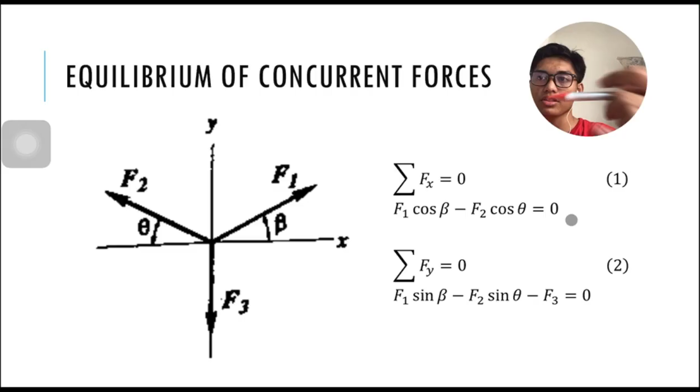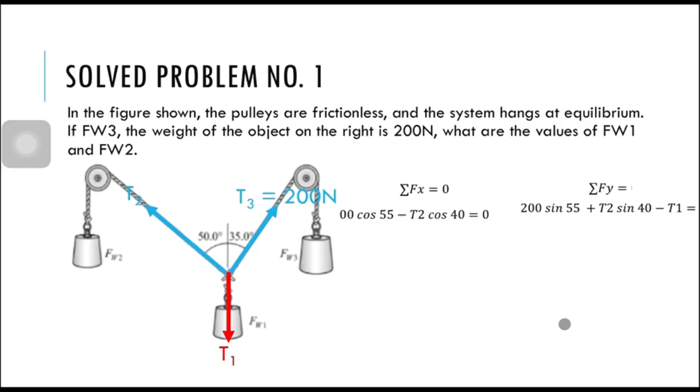Ngayon, if you feel annoyed sa pagsosolve ng simultaneous equation, kahit nung kayo ay junior high school or senior high school, sa inyong Gen Math or sa inyong Mathematics 8, gagawin lang natin, meron tayo diyang Caltech. Ano po yung Caltech? Calculator technique. Okay, other solution we're using calculator technique. Papakalk natin yan.

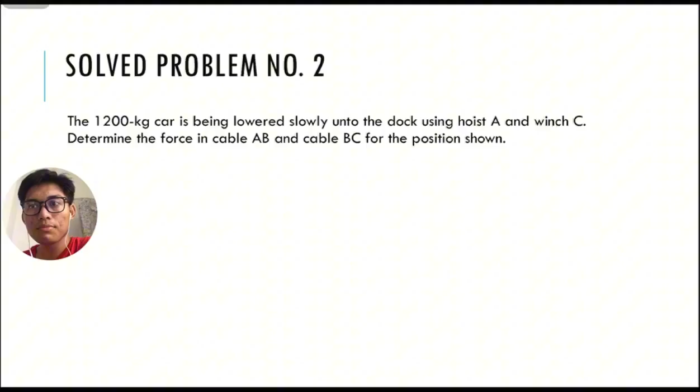Okay. So, next, solved problem number 2. The 1,200 kilogram car is lowered slowly onto the dock using hoist A and winch C. Determine the force in cable AB and cable BC for the position shown.

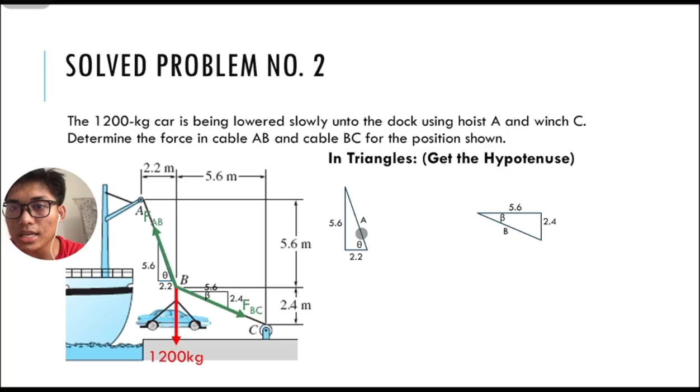Using Pythagorean theorem, kung kayo ay grade 9 alam nyo na yan, saka nung pre-cal, hopefully everyone na math learners. Using Pythagorean theorem, gagawin lang natin dito para mawala yung square ni A, i-square root nyo both sides, and you will get.

6.016643588, 83 rather. Okay, para hindi nyo lagi i-type yan, pwede nyo siyang i-store. Diba kung sabihin natin, another Caltech ulit.

Okay, balik tayo doon sa mismong math. Diba gusto nyo i-store to? Halimbawa, 6.016643583, sabihin natin nakuha natin yan. Ang pipindutin nyo lang dyan para ma-store yung value, same yan sa lahat ng calculator. Shift, yung RCL na makikita nyo dyan, yung orange, yung STO. Then ngayon pipili kayo sa letter, A, B, C, D, E. Since ang assign ko dito is A, pindutin ko yung A. So ngayon ang value na ng A nyo is, ayan.

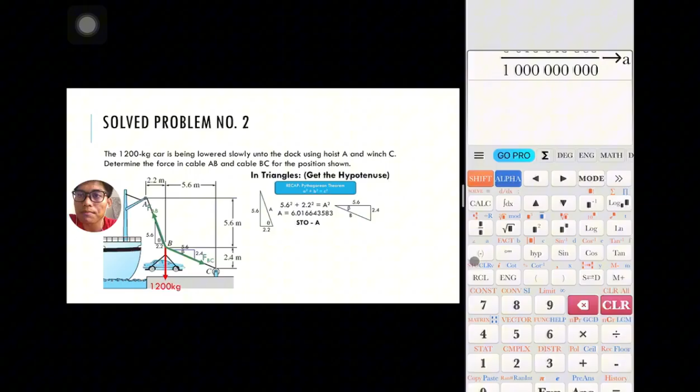Okay, para ma-prove natin kung talagang nagtagumpay tayo mag-store, na dapat ito yung lalabas. So pindutin natin si A. And iyan na yung lumabas. Oh, voila. Diba? Ganun lang po. Next, itong part na to.

So, to avoid decimal error, use stored values found in your calculator. Press shift, then choose the letter you want to choose, example A. When using, just press alpha, then choose the red button, letter A. Ano lang, na-explain ko na.

Okay, then ito naman, Pythagorean ulit, then meron tayo dito, 6.092618485. Store nyo naman siya sa B. Ganun lang po yon, shift, yung RCL na button, then yun. Next.

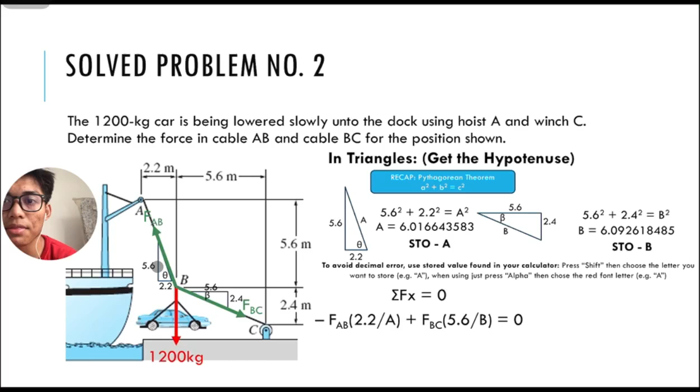Fx, yung summation, gawin natin itong part na to. Paano po natin ano to? Sabihin natin ito yung A, ito yung hypotenuse nyo na, diba? In summation of x, diba itong part na to? Yan, may pen tayo ulit.

So, 2.2, saka yung A. Sabihin natin ito yung A nyo, ito yung B, diba? For store values, we all know diba. Itong part na to, this is cosine. Sabihin natin that cosine theta is equal to 2.2 over hypotenuse, diba? SOHCAHTOA. Remember the SOHCAHTOA.

Yung sumuka ka muna bago ka natuwa, yan kasi ang technique ko. Okay, suka muna bago tuwa. Okay, ang kalat na. Okay, ito yung cosine theta nyo, diba? Cosine theta is 2.2 sine A, over A rather. So, pag sinabi namang sine theta, ito naman yung opposite over hypotenuse, diba? Ganun lang po siya.

Okay, then paano naman dito sa FBC? So, beta to, diba? Cosine beta, ano yung adjacent niya? We have 5.6, tama? Over B. Okay, nag-gets kaya? Next, sine beta, meron tayong 2.4.

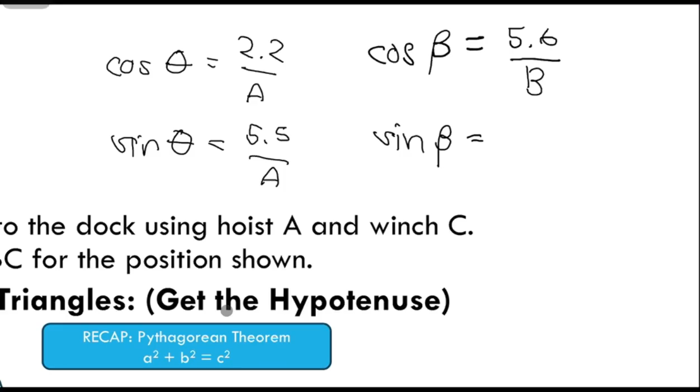Okay, namatay aking pen, nalobat. Okay, so ngayon, ayan, 2.4. Nalobat yung pen ko. Okay, so to deal with, so ganyan lang po yung ating gagawin sa ating trigonometric simplification.

Cosine to, diba, kasi adjacent siya. So ito. Next, for Fy, ngayon ito naman yung F, yung 5.6 over A, sine naman siya. Then ito 2.4 over B, minus siya kasi pababa. Then minus itong part na to.

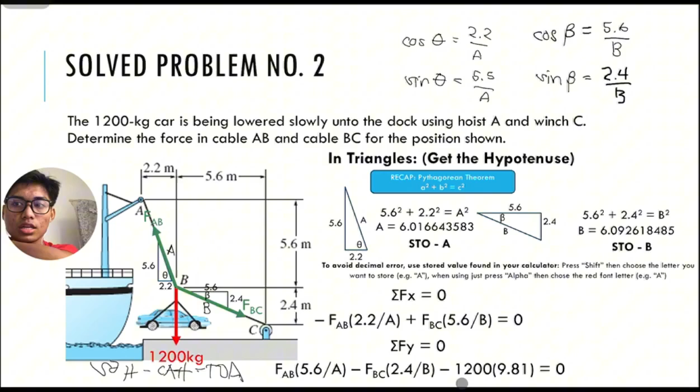Ito positive kanina, ito naging negative kasi dun siya. This is north of west, west is negative. Ito diba this is south of east. Ito, papunta doon, ngayon pababa na kasi negative na si south. Itong part na to, talaga negative yan.

Pero times siya sa 9.81 to make it Newton. Okay, another ano ulit, mode 5, 1. Ganyan lang po ang gawin natin. Ba't dyan ko nilagay yan? Okay, itong part na to, yan. Pwede nyo namang i-ano na si store value na A, kasi ganun din naman ang lalabas. Lalabas naman yung decimal niyan, ganun din dito at dito.

Ang sinet natin na x is yung force AB, so ano yung coefficient? Ito. Then ano yung coefficient ni FBC dito sa summation of x? Then yung C wala naman, so 0. Then itong part na to, ito naman. Then ito negative, ito negative to. Nilipat ko doon sa kabila, positive. Ito, sinundan nyo lang yung format. Hindi naman siya naka-equate sa 0, diba?

Then ang lalabas dyan is we have 15,208.45 Newton. And syempre, FBC, meron tayo 6,050.19 Newton.

Next, problem number 3. The system of knotted cords shown in the figure support the indicated weights. Compute the tensile force of each cord. So this part here, there's a lot going on, okay let's do it.

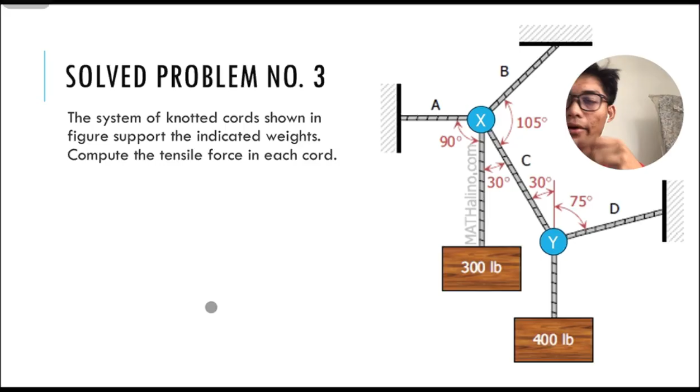Okay, so we have X and Y here. Let's label the points. To deal with this problem, truss analysis will be applied. If we watched the last video, we used the method of joints. To execute, we solve the internal forces of the cords between the 2 points given, which only have 2 unknown forces. This part here is force A, force B.

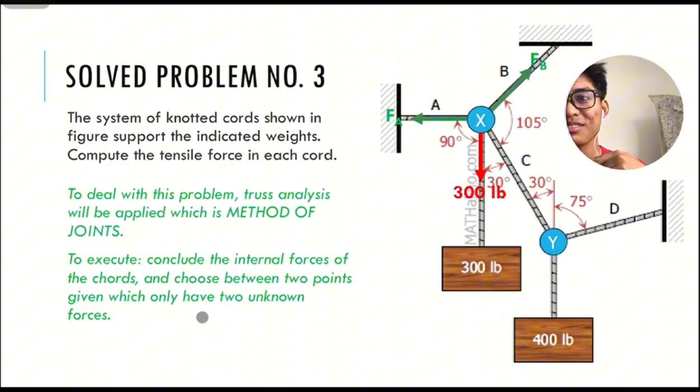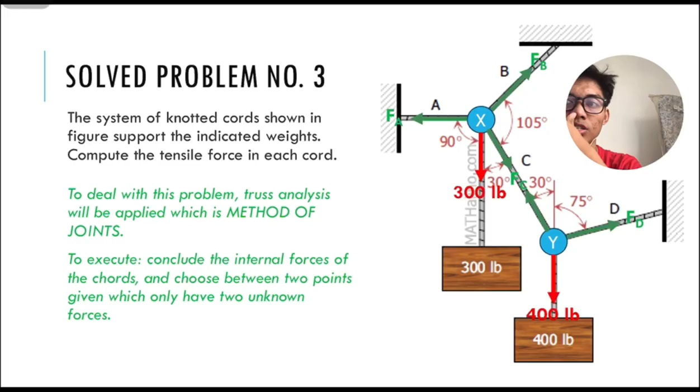There's a weight going down there. Then this part here, we have FC and FD, and we have a weight again of 400 pounds. Use point Y.

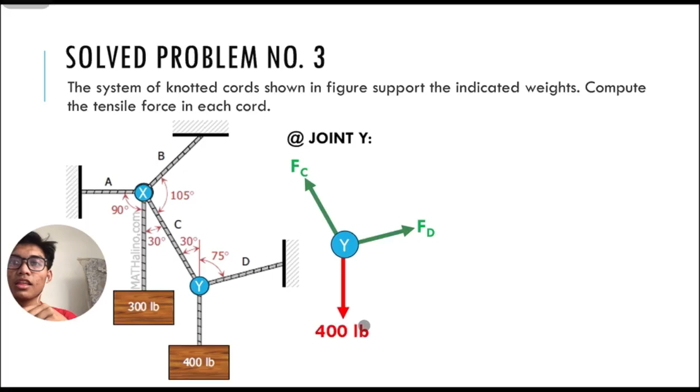So how is that? If Fx, what's the opposite? It's reversed. So sin 30, this one becomes negative, plus the other one is sin. Because it's going there, this is north of east, this is north of west. This part here, next.

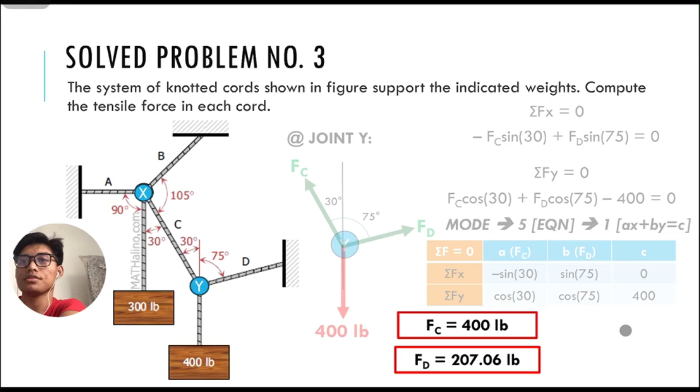Just a trivia note. So now we have FC and FD. As stated, we still have A and B remaining. So now at joint X.

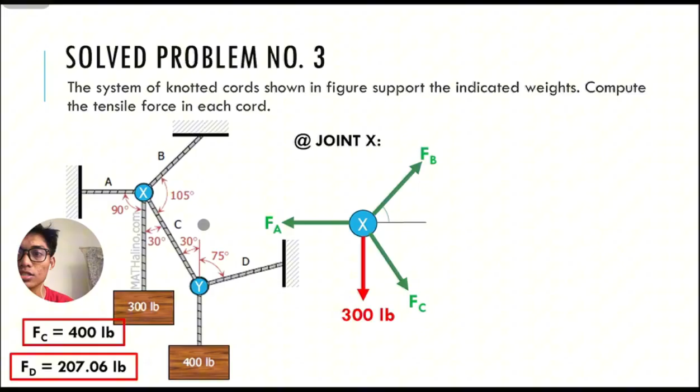Okay, so now the angle here - we have 105, analyze it using common sense. So we have 45. If we say, in this part, if you divide this, this is 90. That was 60, right? 105 minus 60, you will get 45.

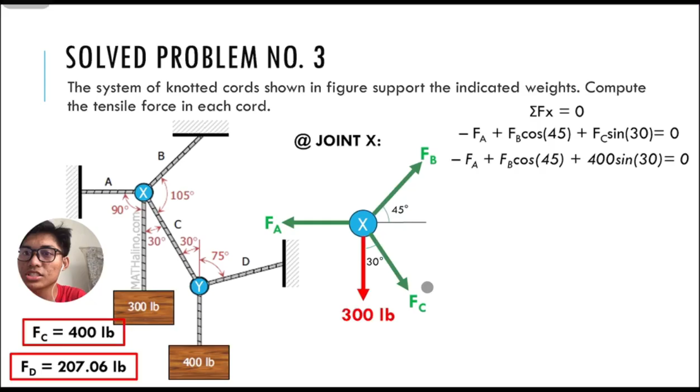Okay, so summation of x. So we have this part here: negative FA plus FB cosine 45 plus FC sin 30 equals 0. Now, this part, I just made it 400 because 400 is what we got for FC.

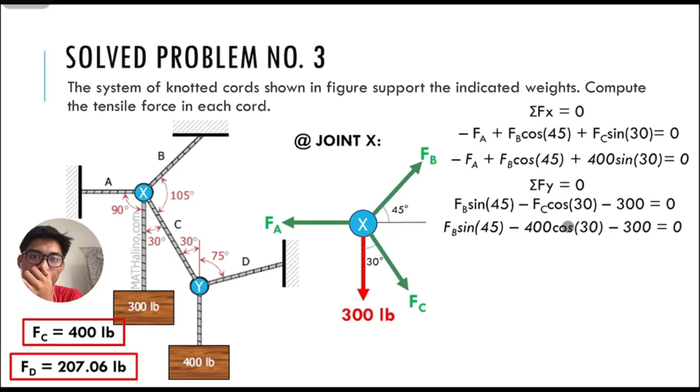Then FY, so this part here, and this one - FC which we already got, which is 400. Then using calculator mode 5,1, just type that in, and we will get 846.41 pounds and 914.16 pounds.

So, we've solved it, and hopefully everyone gets that problem.